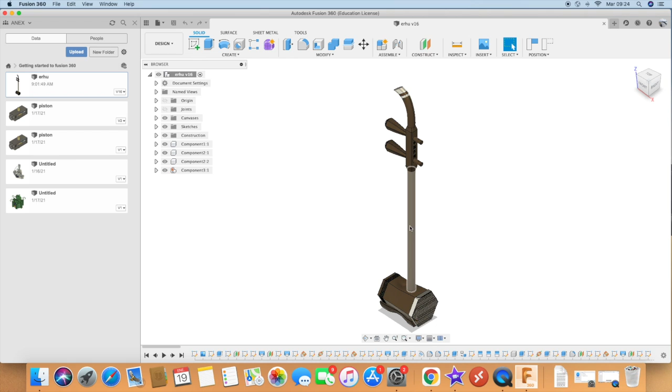Why do we want to do a drawing from an animation? Well, as you might remember from a quick animation we did a couple videos ago, you can actually animate an explosion of this, which means you can bring some exploded views into your drawing, which would be very beneficial to show how each part is interacting with each other.

We can go over here to animation, and I just did one - I was practicing by myself, so we can see what this does. It's super simple. Let me just create a new storyboard. Okay, so these are the different animations that we got.

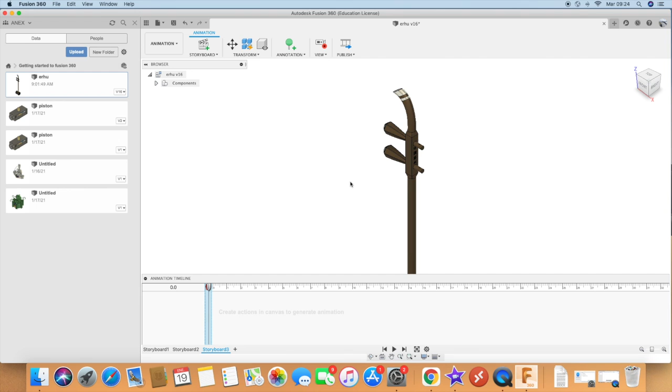I want to delete that, I just want to begin right from there. I'm going to pan a little bit, like that. Then, as you might remember, all we need to do is move this over to the time we desire it to be, then click on the piece, click and transform. These arrows will appear, and you can say, alright, I want 5 millimeters.

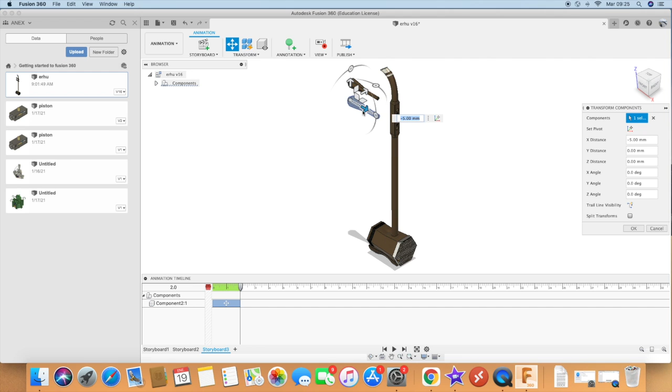That's okay. Let's do the same thing with this piece. That's why it was important for us to design all of this in components instead of a single piece, which otherwise wouldn't have allowed us to do the following things.

Then one last piece, just like that. Let me just stop the view, so that whenever I'm panning around it's not recording that. So let's see - what is it doing? Alright, that is reasonable, so then we can save that real quick.

Beautiful, and then we can go now to drawings and say do a drawing from the animation. Storyboard number 3 is the one we're using from scratch. You can choose whether you're using ISO, an international standard, or ASME, American Society of Mechanical Engineers. I'll use ISO, I just prefer that. Units, of course, millimeters in our case.

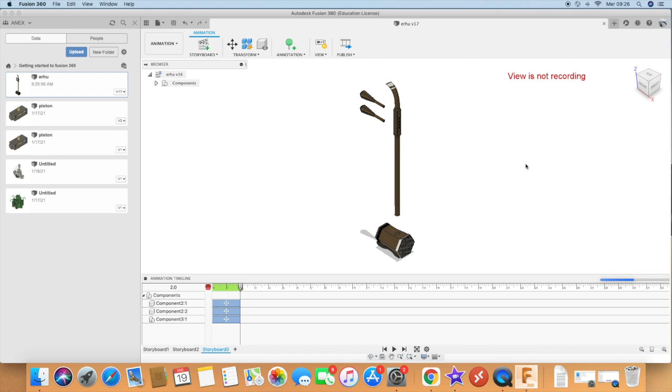Let's give it a moment until our page opens and we can continue editing. In the meantime, while this is loading, I can tell you why we want to do drawings. Maybe you have encountered drawings in the past - those blue pieces of paper that have pictures of models and whatnot.

You'll see this one appearing in a moment, and essentially it just describes how our model comes to be, which is super important. We need to denote dimensions, we need to denote things about how to manufacture this piece, all sorts of things. Alright, here we go, the page that we wanted.

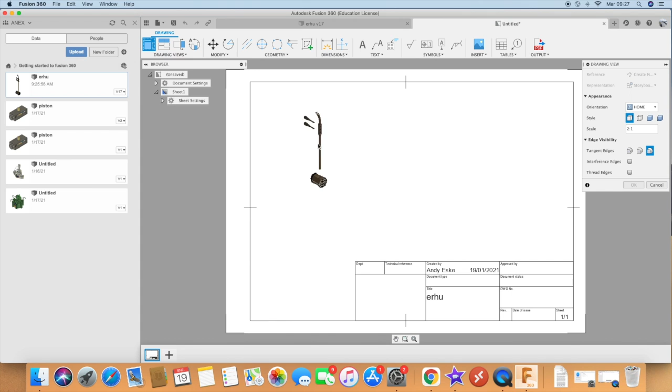In our case, we want to show our Erhu - the view from the storyboard has already appeared, so we can just leave it over there. And yeah, we want to denote dimensions, each piece, some characteristics, and all sorts of those things.

We can modify the scale here. There's a couple options - let's see, not 1 to 1, let's see, 2 to 1, 4 to 1, that'll be too big. Oh, that is okay. Let's just move this downwards. How do we move it?

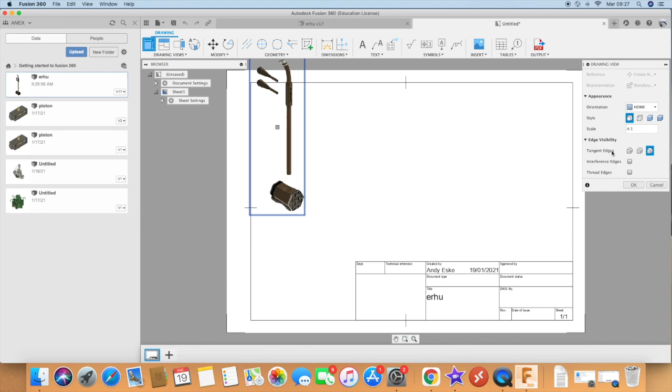Oh yeah, maybe I'm gonna - no, I don't want to, base view. Let me just bring the base view again. There we go, I'm gonna leave it there. I believe once you moved it - oh, you can move it afterwards with this. But let me just, you can modify this. I believe you shouldn't be able to - oh, let's try that actually. Let's just give it a moment until it renders.

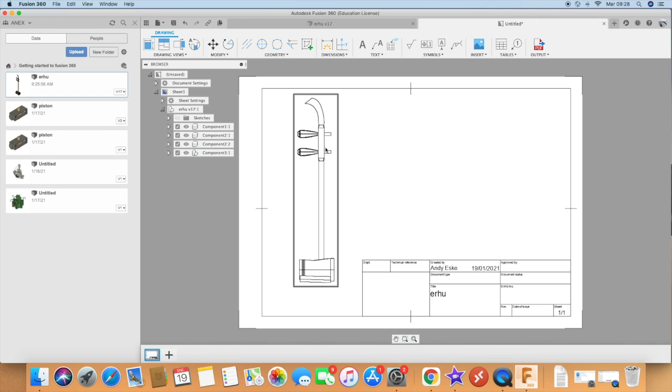Let's see whether we can edit this view. There we go. Let me delete that, and I'm gonna bring a base view again.

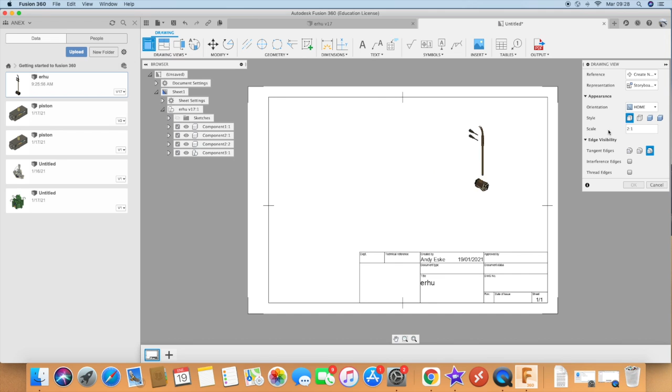The options let us select whether we want it from the model or from the storyboard. If we choose the storyboard, you'll see it's angled a little bit, and it has all of the pieces separated. One thing I'm already loving about this, which you cannot do in SolidWorks right away, is this.

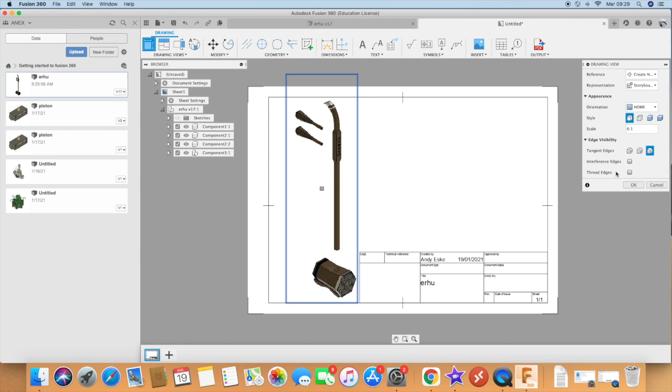You can say whether you want to show the body shaded, or show it differently. It's not actually updating right now, but it will update in a moment. Let me click OK. You'll see now it's all completely white.

One way to change that is we double click in here again, and we can change it. Actually, I want it shaded. There we go, because it looks much better like that.

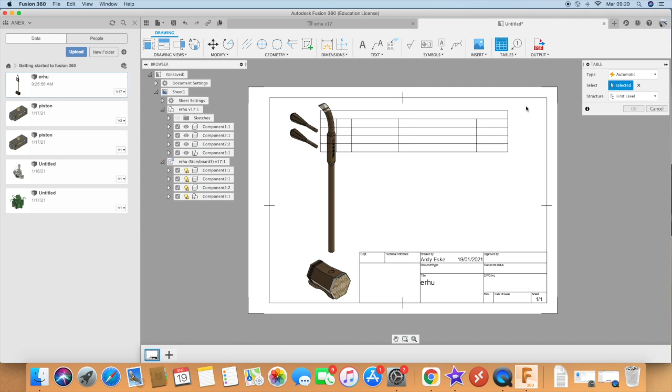Now look at what we're gonna do. We can bring a table. That's why I wanted to do it like this. Yeah, we can leave it like that. Automatic, of course.

Just click... where did it go? Oh, it's taking time to open up. Well, it didn't name the components really, but you see all of these bubbles appearing automatically. I can move them around. I'm gonna leave that guy there.

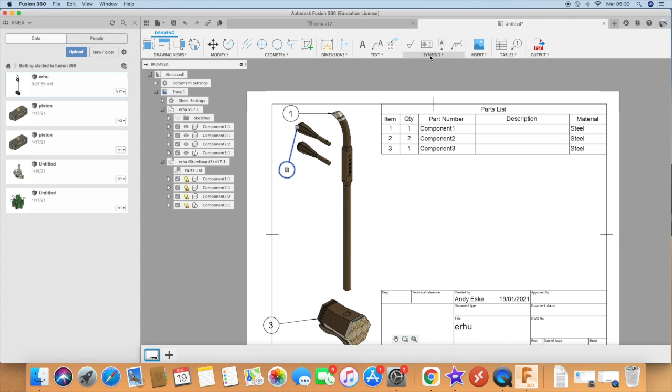I'm gonna leave number 2 down here. Let me see whether I can add another bubble here. There we go, I just added another one. I'm gonna leave number 3.

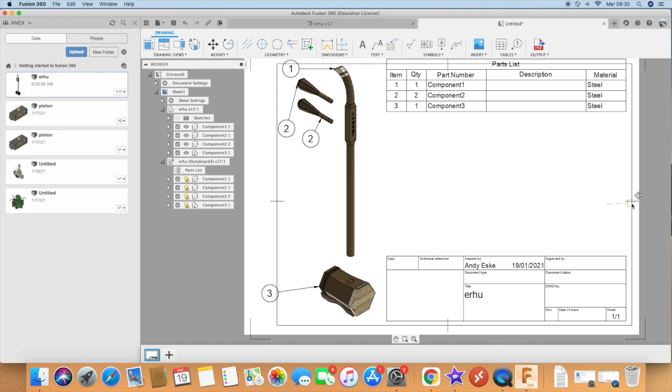Hopefully it's not lagging. Oh no. There we go, yeah, I'm not modifying the bubble. I'm modifying this guy. Let me just fix this real quick. There we go. Yeah, should not touch that. I just wanted the bubble. There we go.

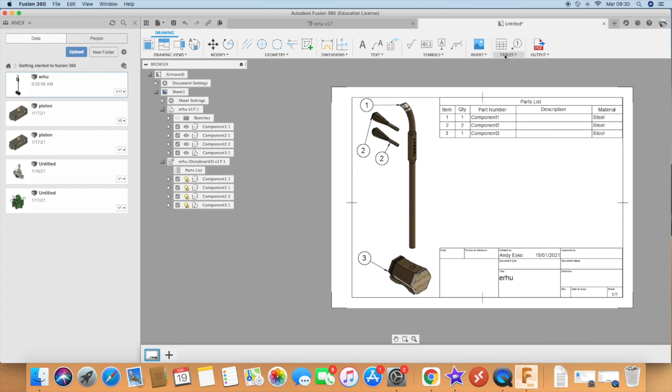It seems pretty good so far. If you want to rename those bubbles, you can right click in there and we'll search part list. Oh no, actually cancel. Let me see. You can renumber how you want them to appear.

So number 1, I can have this being number 1. Is it allowing us? There we go. Then number 2, I want to select these guys. Number 3, I want to select those guys. Boom, so these should have renumbered themselves.

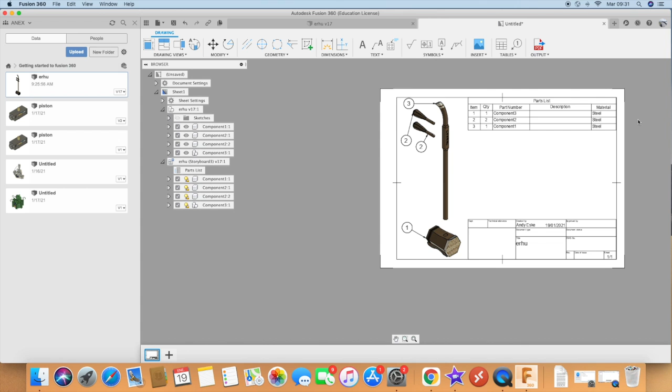And I can see whether I can change the names of these guys. Actually, if I go back to Erhu, if I go here to design, let me see. I'm gonna call this the...

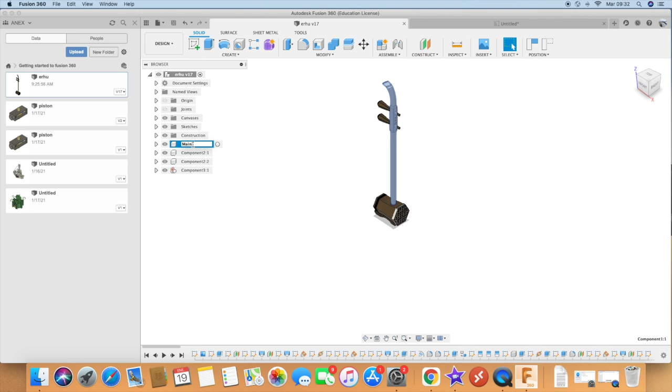Hold on a moment. There we go. I'm gonna call it main frame. This one I'll call it peg.

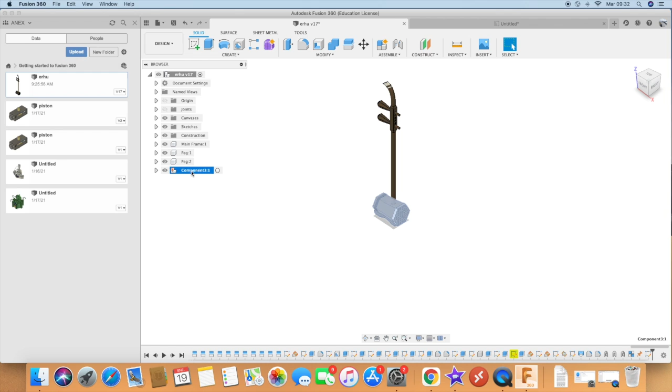Oh yeah, I understand. I just want to... Oh yeah, I don't want to do a sketch, I just want to rename these guys real quick. Peg 2, and I call that box. Yeah, just box.

Alright, let's see whether it actually renamed them. No, it didn't rename them, did it? Well, you got the materials. Let me see whether I can, I want to edit this box.

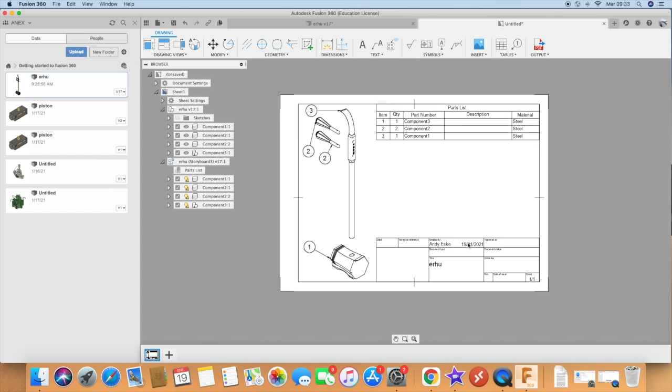It doesn't matter, I can just leave it like this. Well, there was an option where you could edit stuff, but there we go, at least it's now allowing us to edit these things.

So I can say, alright, technical reference. Well, I don't really know. It's called the department mechanical. Just leave it like that. Created by Andy, I'll just leave it without my surname. Document type drawing, Erhu.

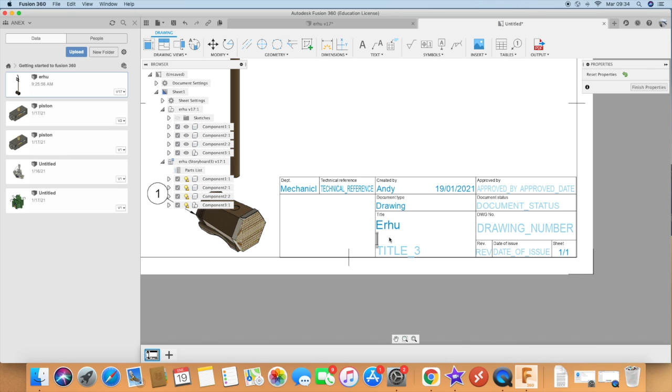Like that. You can say a two string Chinese, a two string down there, Chinese violin. Approved by department, drawing number.

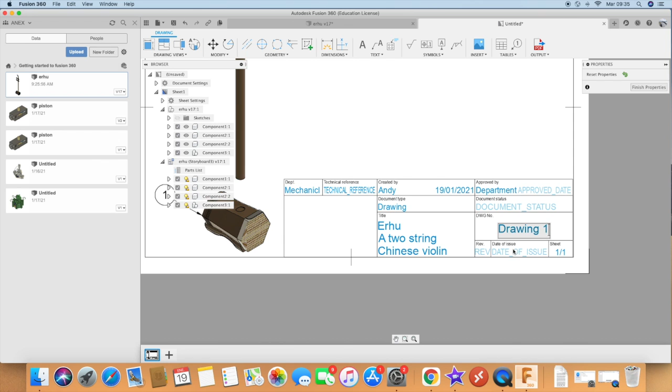One. Date of issue, today is again 19,01,21, sheet 1. They're finished properly, so now it's looking a lot more professional. That is looking real pretty. We got a few things and now...

Unfortunately it doesn't allow us to do the editing on the table. No.

Well, at least what you can do if you wanted to add a description, you can always add text like this. So I'll add a text in there, and I'll say component 1, which is this one. I'll say material, I could say color is brown, something like that. And then you can modify, click here and move, so you can move that a tiny bit as you wish.

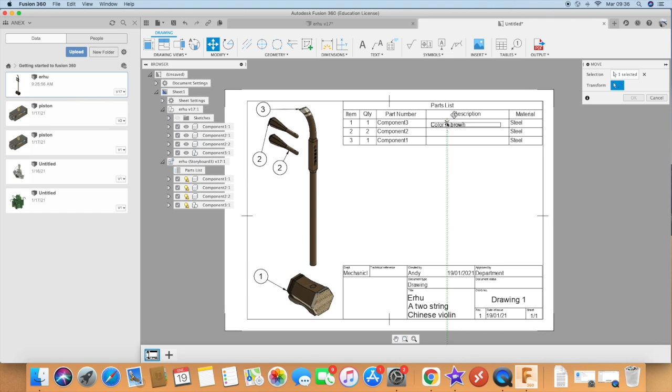Let me just zoom in there. So we got, there we go. Oh, where did it go?

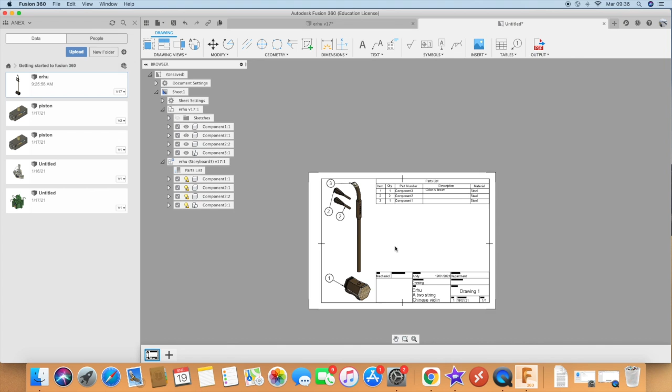Well, you can also move these guys if you wanted to, just a tiny bit. There we go. And then when you're good, you just click escape. We'll speak about all of these in a moment. I'll grab another drawing view in just a second.

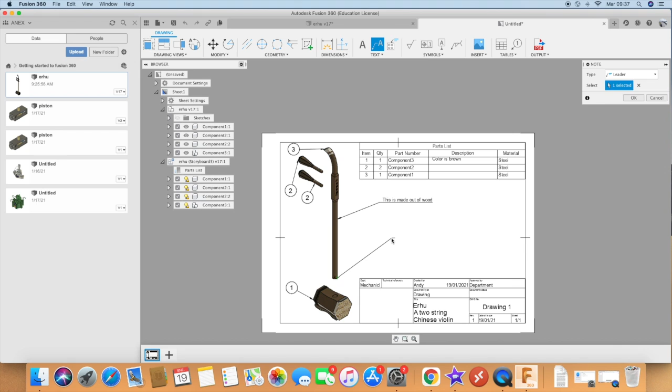You can always add notes, for instance. I click in here, and this note pops up and I'll say, this is made out of wood. Or I can grab another note and say, right there at the edge, this is normally done in machining, break all edges. I can close that, with the note disappearing nicely.

You can do it also for holes. We do have a hole there, actually, but it's not really a hole using the hole feature, so maybe that won't work. There's all sorts of things useful in machining, like datums, identifiers, welding, whatnot.

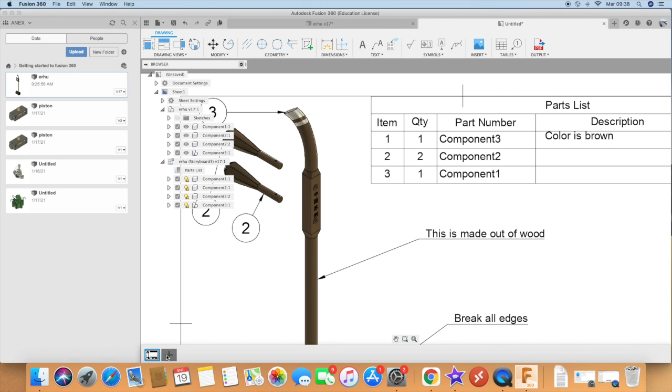Even grab pictures. But I'm gonna do another drawing, another page. I'm gonna add a base view, and yes, I actually do want my model, and I'll leave it like that with a scale of 4:1. No, yeah, I'll leave it at 4:1.

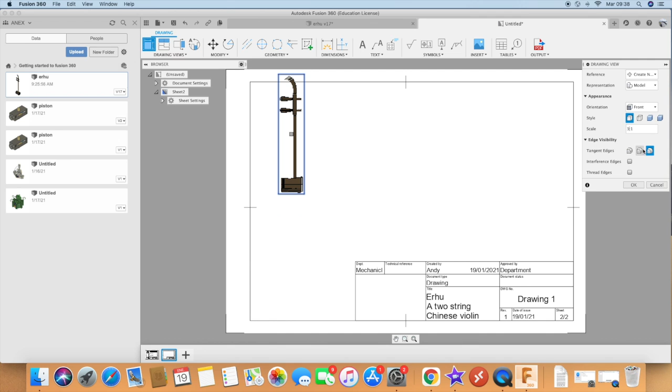No, 3 to... you know what, actually 3? I might actually leave it like that. Edge visibility, okay, you see now it's all white. So now we're gonna do the actual... escape. There we go. Now we're gonna do our actual drawing.

Now we've got our base view. And what does the base view mean? This one is gonna be static. Now we can add projected views out of this. You see, I just click in there and go down like this or up like that, and it begins to project different views.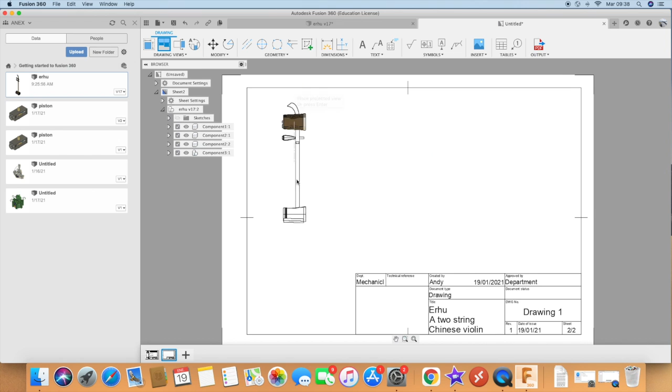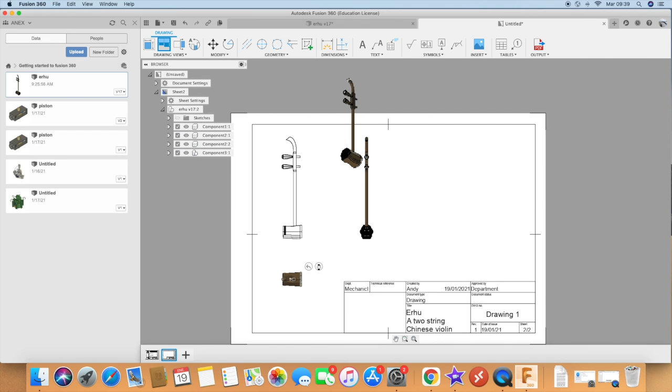If I go diagonally, it brings you the diagonal view, boom. I can do a projected view like that. I can bring another view that goes like that, and a view that goes like that. I'm gonna click OK in just a moment as soon as this little watch is done.

Then I can just move them around very freely, because SolidWorks actually constrains you when you're doing drawings with how you're moving them. While in here, you have complete freedom to move them however you want, so I can just move them around like that. Although this one is gonna always be aligned at the same height.

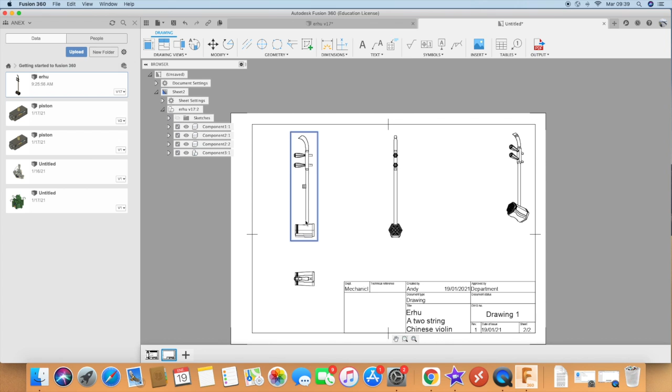And then you can add, I can click in here, and I can do a projected view of the projected view itself, you know what I mean? It's like nuts. Maybe I don't really need it. Yeah, I'm gonna click escape, I don't really need another projected view.

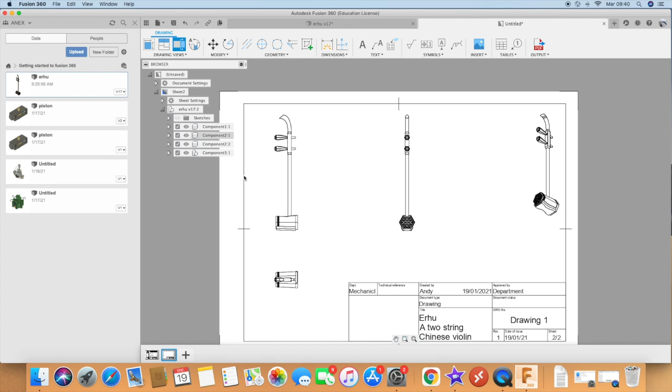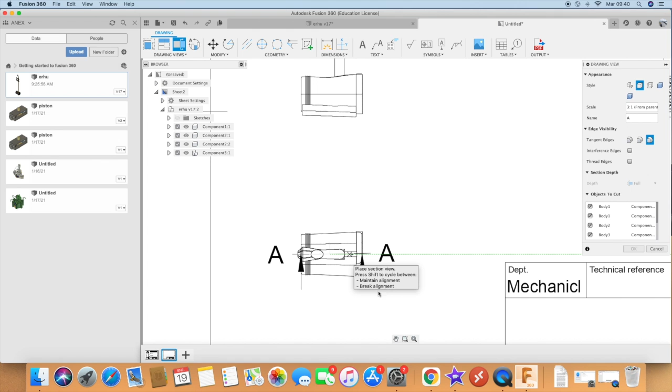I can do section views, for instance. I click down here, let me see whether I can click like that. I'm gonna do a section view. Right, so AA, let's see how that's gonna show up. I'm just very interested to see that. Alright, oh, that is looking spectacular.

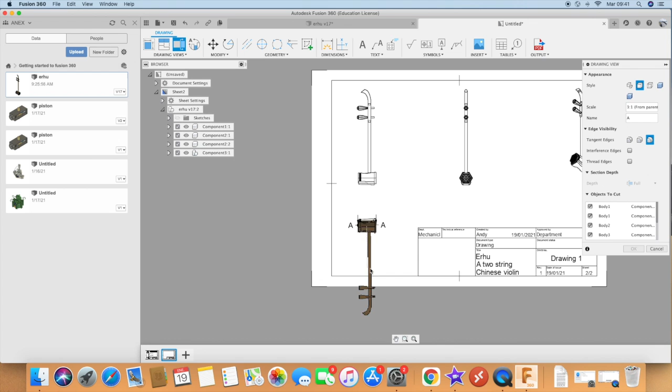Maybe I'm gonna leave it, we should put... yeah, I'm gonna leave it like that. You see how the arrows change? We just click OK and then I'll eliminate it, but just to show you what's going on here.

So section A, imagine like a cut right there. And it shows you that we are looking at a cut inside of this. You see that this is hollow in here, which is pretty cool if you ask me. Then we've got the base piece and whatnot. But I'm gonna delete this because otherwise we won't have enough space for what we want to do. And I'm thinking, yeah, let's begin.

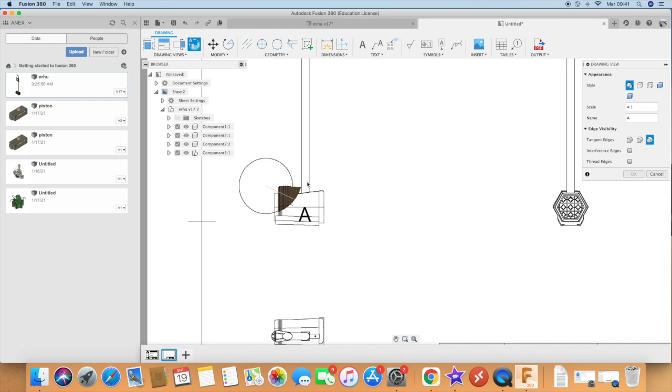Oh, I should also show you detail view. I can say, for instance, I'll do it over here, so it's like doing a quick circle, right, like that. And then we're gonna have a detailed view of this. I can leave it like there. And I can say how big of a scale I want.

Let's say 8:1, so it should be much bigger. And then with the name A and whatnot, I can leave it like that to get a better view of what is actually going on in there. And I can move that label closer to here, like that.

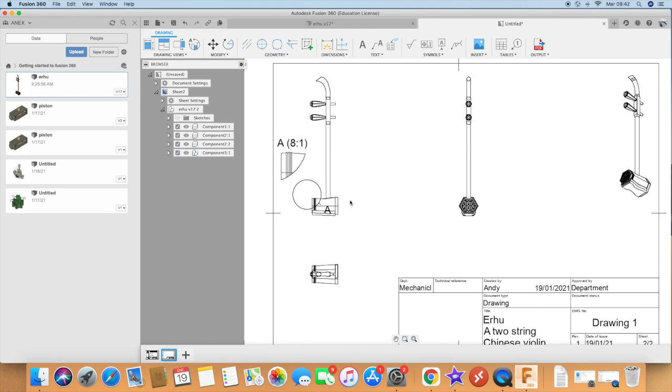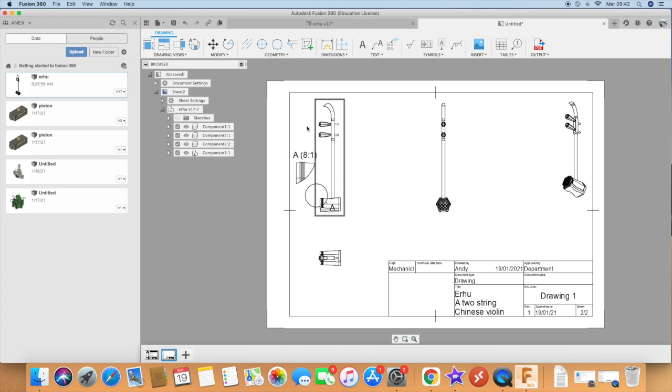So with drawings, the most important thing is that you're providing the most dimensions possible, such that if somebody was gonna grab your drawing, they would be able to at least get the important information. I mean, you give drawings in order to design things. So it's a little biased from our side because we are the designers already, so we know the dimensions, yet we have to provide as many as possible in order for people to know them.

One last thing, imagine I have a circular thing, right? I can say, alright, I choose these two and you see how the center line appears. And I can extend it a little bit, I believe. I should be able to.

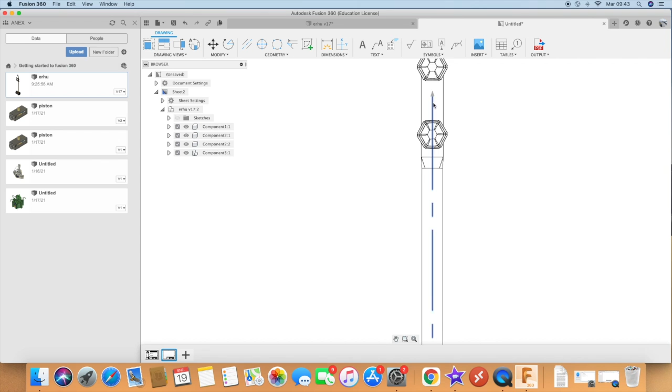Oh, there we go. Let's just click on the arrow and you can make it even taller if you wanted to, just to show that that is concentric. Oh, I didn't move, right? There we go.

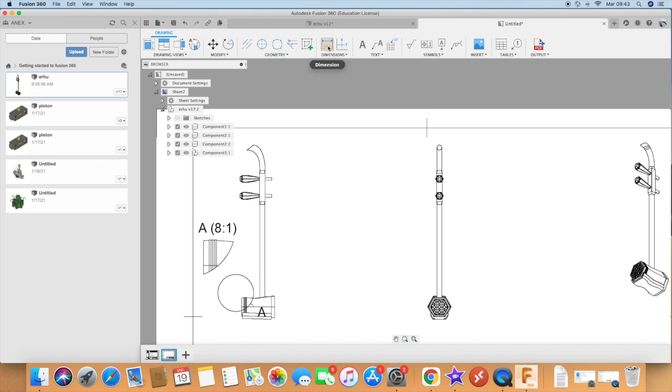Oh, I want a center mark. And now is the time to actually begin providing dimensions. So I'm just gonna click in here as if I was doing a sketch, and you begin providing these dimensions. You have to provide as many as you want, as many as you feel is necessary if you're the designer of this thing.

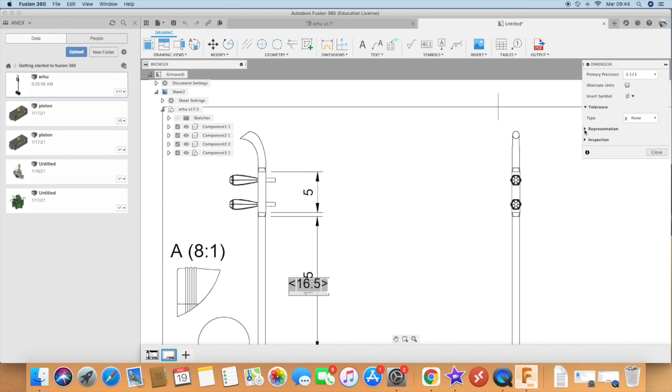There's a couple of things I should say: if you double click in the dimension, it allows you to select with how much precision you want that particular dimension to be. You can specify it for the whole drawing in settings, or just for this one in case you need more precision. But as you can see, we don't have any tolerances. Since we didn't use more than 2 decimal places in this case, the highest precision we can go is this one.

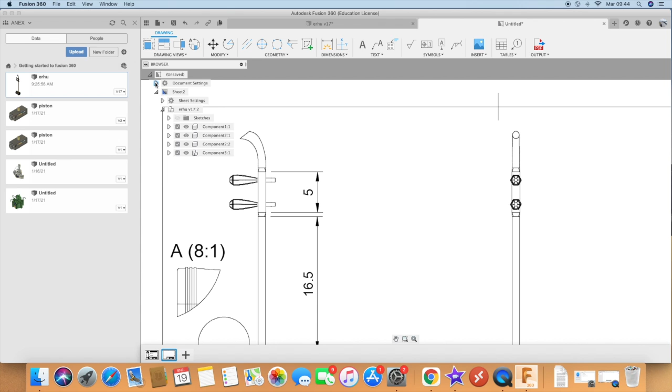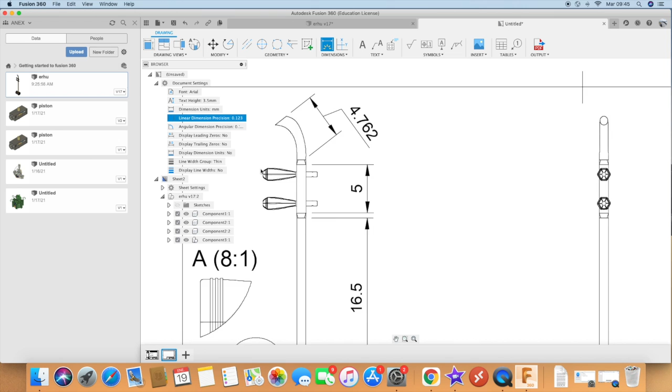I mean, it won't change now because this is already pretty rounded up. That's what I like doing with my numbers. But for instance, if I choose this dimension, like a random dimension, you see that it already gives you 3 decimal places. There's a lot of dimensions that we can provide. You just need to cleverly click on the numbers that you want to denote the dimension of.

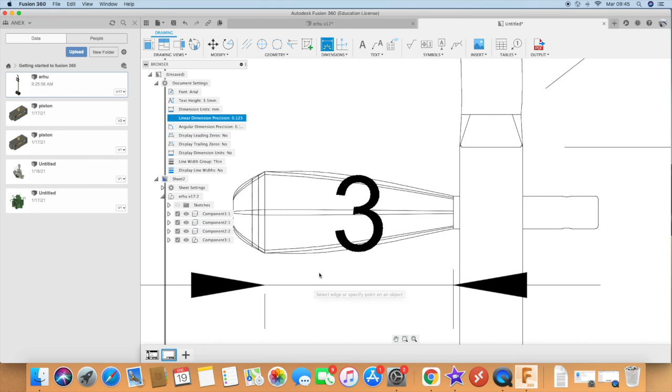I just want, for instance, the distance between that face and that face, which is three as we intended it to be. We can click on it and move the number. There we go, like that. We can move it. There we go, that is reasonable, that is three. We can go on like that for a long time, providing as many dimensions as we need.

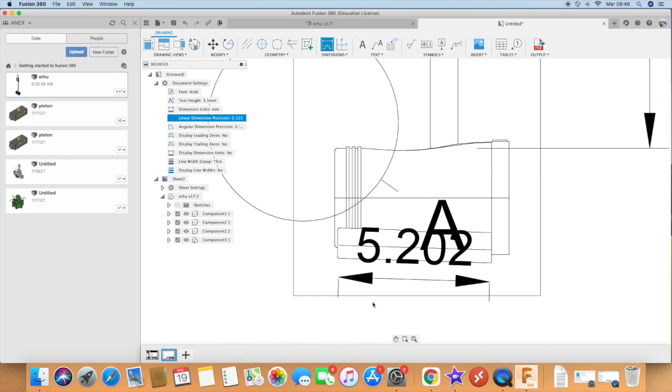Boom. Oh. Just continue dragging it downwards. You can also click on these guys, on that arrow point in there, and drag everything downwards.

So yeah, and it's gonna look a mess. So it's maybe better to do a drawing for each piece, and we'll do that in a moment.

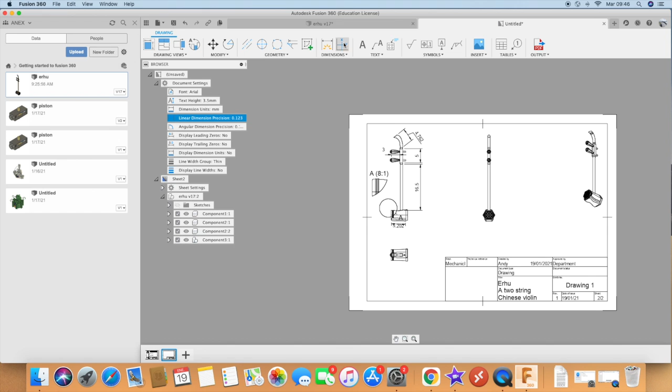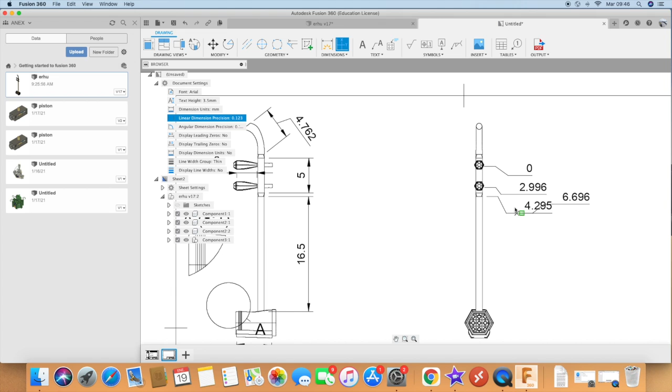You can also do this ordinate dimension thing, which allows you to give dimensions for... let me see whether I can do that here. It allows you to see changes in dimensions, how much distances are changing from one point to another. So this is like the changes in height, I would say. It's interesting, but I just don't like these guys. It's just another way you could provide dimensions if you need to do that.

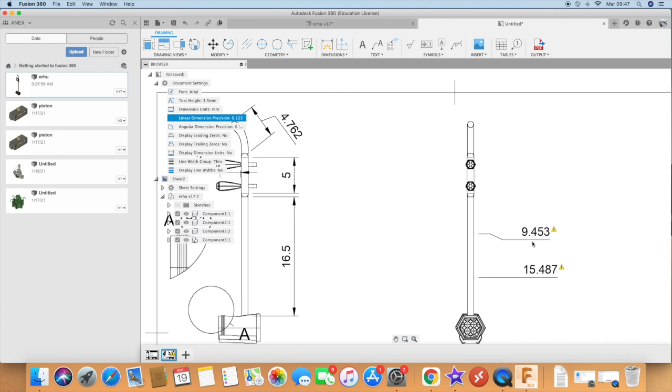Just remove all of these. What other things? Well, again, for the text you can just add random notes, like say 'break all edges,' right? And just choose your favorite font size, make it bigger, close.

And then once you're happy with what you've done, you can always just output this as a sheet and open PDF. Let me cancel. You can output also as a drawing file.

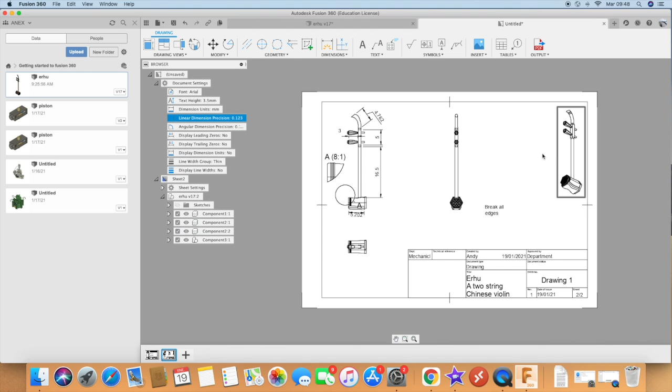Alright folks, I'm back again. I just did a quick Google search to see, I remember how we were trying to edit this table. So it turns out that Fusion doesn't allow you to edit it, since this was an automatically generated table in here. It doesn't really allow you to edit it, which is very sad.

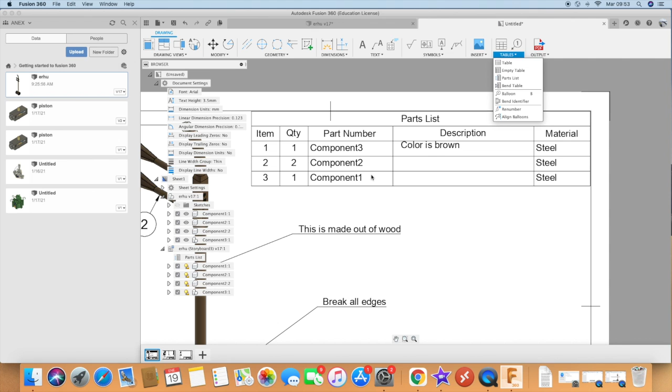So to solve this, I went over here to a new drawing, right? And we can literally create an empty table, and I can just leave it over there. And now, yes, now we can begin editing everything.

So we can call it the famous bill of materials. There we go, boom. And we can edit our part in there and say part name, and quantity, 1. I should say like number really. I'm gonna do it like that.

Part name, similar to what we got. Quantity and then notes. So this is a lot better, and let's see whether we should be able to edit the fields, right?

There we go, I think it should allow you to do it like that. If you want a number, it should be rather small - part name, maybe notes.

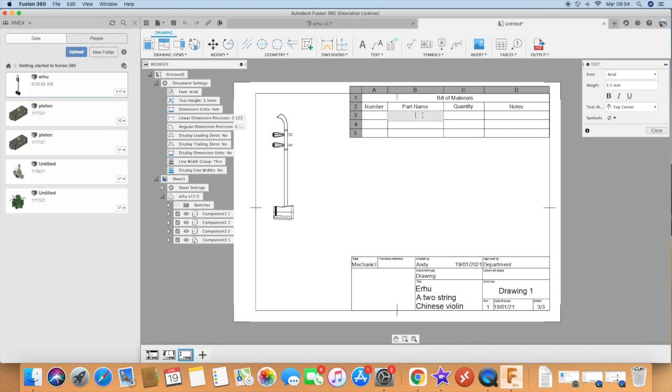So you got a lot more flexibility with how we're doing this, right? So we can say part name - we got main frame was one of these, then we got the peg and box. How many do we got? We got 2. It's not automatic, which is sad, but at least you got the flexibility that you can edit it.

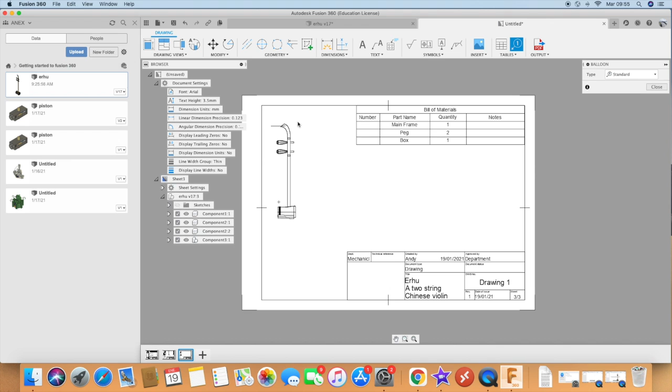Now let's go over the tables and we can actually insert the balloons. We can say it's gonna be our number. Well, I'll change the numbering shortly.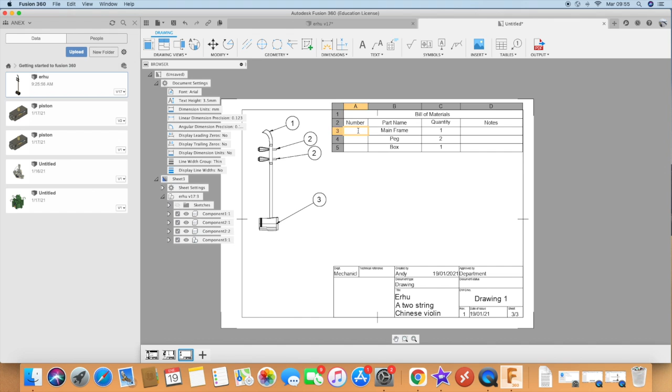I think that was how we left the numbers the other way around. Oh yeah, I like them standard. Let me do a quick renumbering. So I want to select that to be our number 1, number 2 is still gonna be that, and number 3 has to be that. Okay, so 1, 2, 3, which is like the balloon number.

So this is pretty good. And now we're gonna do one last sheet because there's one last thing I want to show you. The question that I was asking myself before is, what if I want to edit or just do a drawing of a specific part of our assembly? And that is not hard at all, actually.

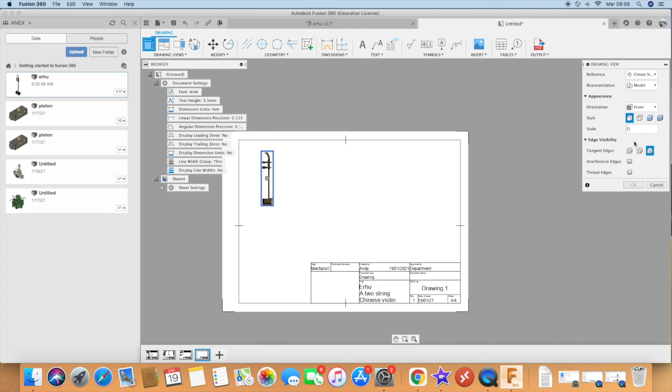We're gonna go here to base view and bring our assembly from the model as usual. Let's give it a nice scale of 4. And now, here's the magic, and I feel this is very, very neat.

You see these eyes? Look at what happens when I've been hiding them. You're just left with the main frame in here, which is spectacular. So now I can say, all right, let's draw a projected view of just that piece. And that is exactly what it's doing.

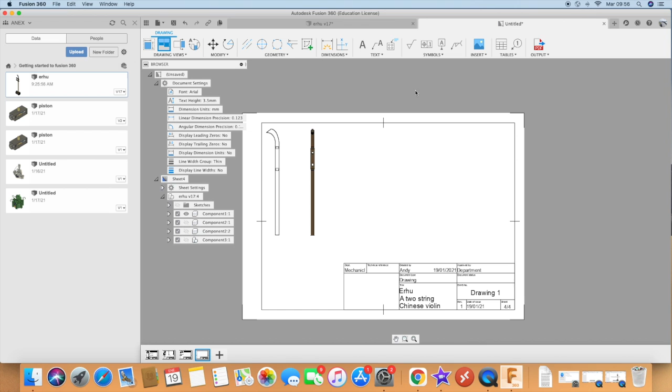And we can have a nice orthographic view like that. Okay, we're gonna leave that over there, we're gonna leave it like that. So now it's much easier to edit things as we go. We can quick add another page.

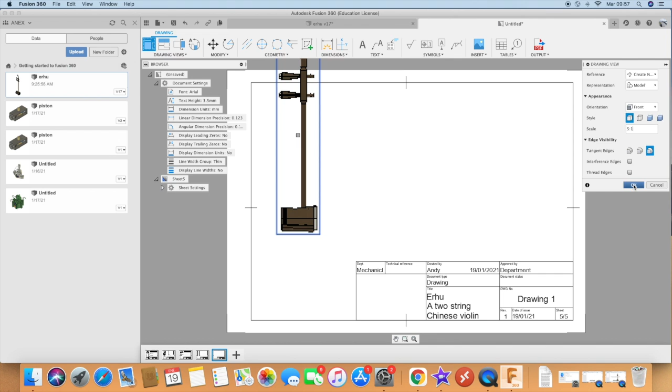We can do the exact same thing, but I just want to stay with the box. And in fact, we're gonna make the scale be 5:1. And now we're gonna do like this - I just want the box.

So we're gonna add a couple of projected views. Yeah, we need to click what do we want the projected view of. Maybe like that, do a back view like that. I think we are good with that.

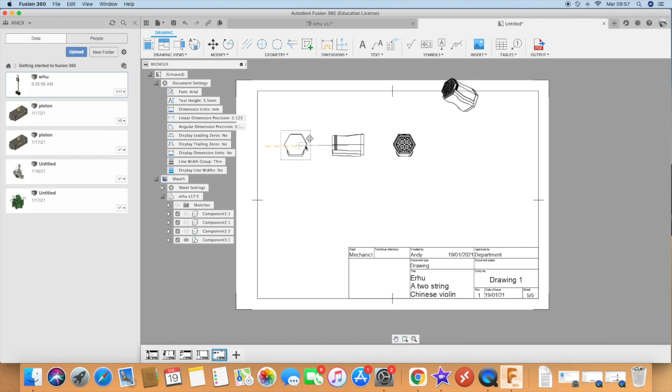And now we can just move everything like this. Oh no, I don't want to move this piece, I want to move that piece. Just like that. And now yes, now we can do a nice and good old section view of this thing.

We can go from here to here like that. We are happy with that section view. Let's click enter and let's see what appears. Oh, there we go. And now we got a nice cracked open box, and see how it's looking inside.

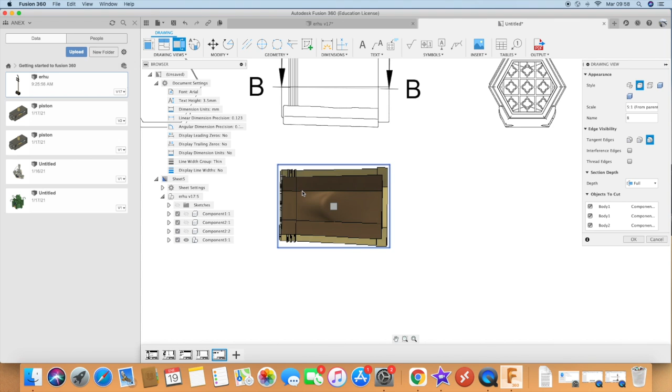We can leave it as the same parent scale. Okay, that's pretty good. And then we can leave our label down here, right? We can continue modifying pieces and whatnot.

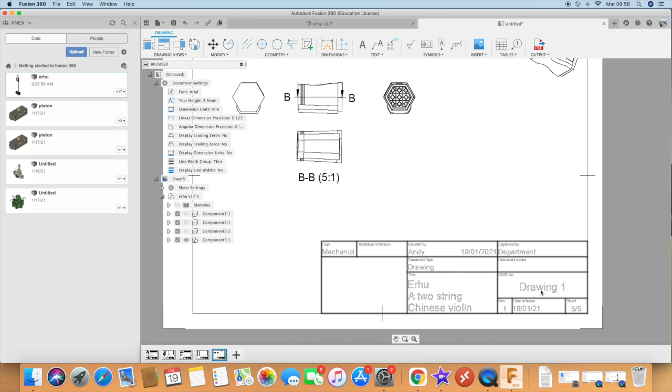Let me see whether I can edit. So you got our sheet number in there. That is pretty good. Oh yeah, like everything is drafted over. Let me see if I click in here, drawing number 5, will all the pages change?

Oh no! Alright, so that was just unique to that one, which is pretty good. So you can edit specifically for this drawing in here, and add as many dimensions as you need.

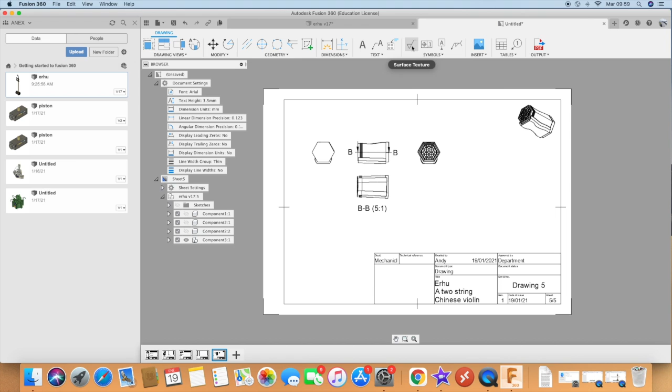These guys, I don't need to use them in my own experience. Here I think it would be appropriate now to use the center. No, well, not really, because this is not quite a circle, but I guess you could. No, you can't.

Anyways, folks, this is all I wanted to show you about drawings. I hope you found this useful. And yeah, good luck doing your drawings.

Again, this is the most important thing that you need to know about any design software. When it's always integrated like this, that you can do a model and then bring it into a drawing, that is super important, because it allows us to understand, even after designing our model, how everything comes together and how we should build it, how we should manufacture it, and what are the specific dimensions, what are some specific notes that we want to indicate to our users, and whatnot.